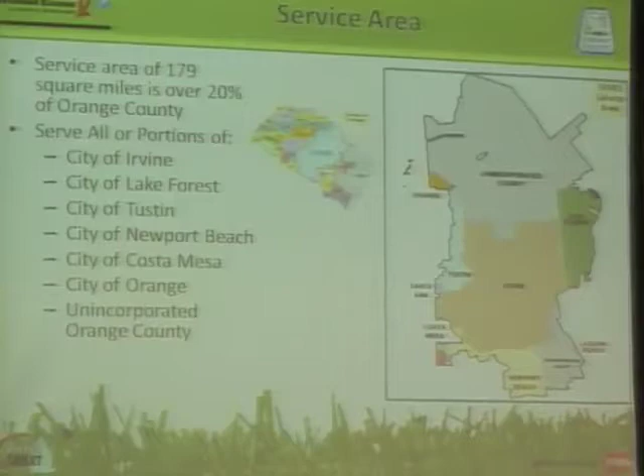So Irvine Ranch Water District, we're actually located in Orange County. We're about 20% of Orange County. And so we serve all of the city of Irvine, plus portions of 5 other cities and unincorporated county. And we have been practicing water use efficiency at least since the late 90s, if not earlier. It's something we took to heart very early on.

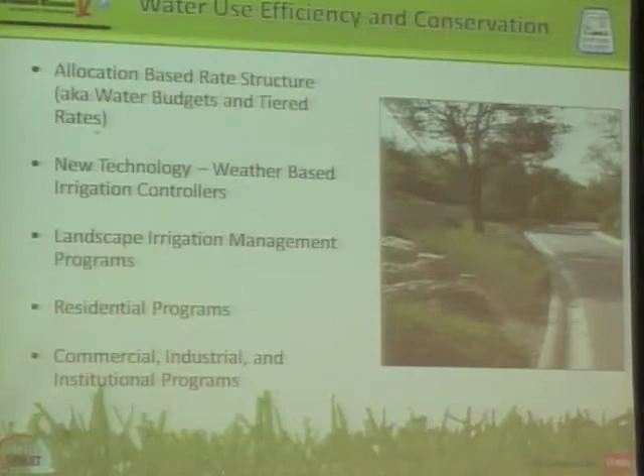I'm going to talk to you about a water budget-based rate structure that we actually adopted almost 20 years ago. We've also been a leader in doing studies and researching new technology, weather-based irrigation controllers. We were one of the agencies that first studied those. We have very effective landscape irrigation programs, and I'll share a little bit about some of those with you. I'm not going to focus on them today, but we obviously also have programs for our residential, commercial customers too.

So let's see, water budgets. What's a water budget and why would you care? In simple terms, a budget for anybody is usually just a list of your expenses and your revenues. And really, you come up with a plan for how you can save. And what I like to do is spend, so a plan for how you can spend, how you use the money. A water budget, real simply, is just a plan for managing your water use and saving the water that you might be wasting. And in that way, you're going to also save money and a lot of other things too.

Typically, one of your major costs of landscape maintenance might be water. That isn't going to change. I was just chatting with Tim from Metropolitan; they provide all the imported water to Southern California. We're a water agency that sells direct to customers, but we buy water from Metropolitan as well as have local supplies. Our cost of imported water from Metropolitan over the last 5 years has gone up 75%. So why do all these things about shortages in the state matter? Because ultimately, the costs for all of us are going up.

And that means water rates might be going up, and guess where you can save? By really managing your water and looking at your water bills. So it really helps if you're tracking your water budget versus your actual use. And your water budget is one of the great tools that can be pretty cheap to help you do that. It can be as much as tracking it on a piece of paper or in Excel, or it can get more complex than that.

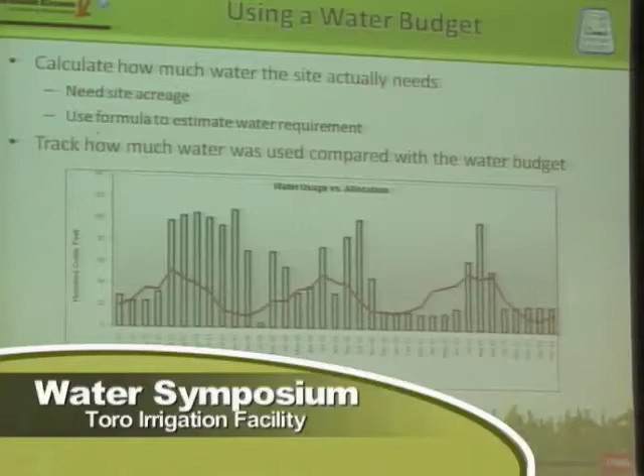And if you don't know, then I would really recommend that you find out, because how would you know whether you're wasting water or not if you don't know how much water you're supposed to be putting out there? It might be worth it to have your landscaper measure, or look if you've got landscape plans, or find out. And then there are general formulas that you can use to estimate how much water you would need.

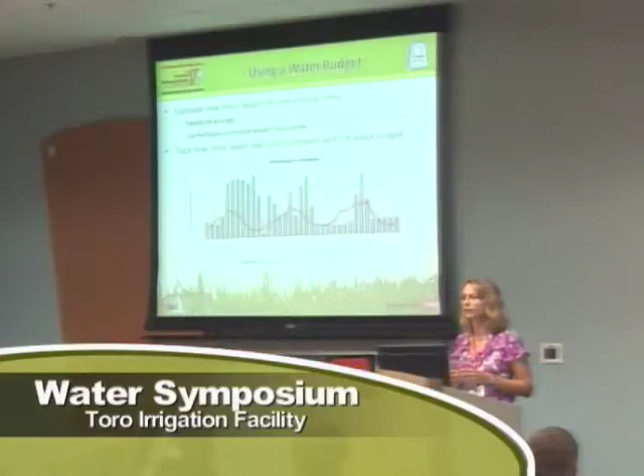And a lot of us water agencies, water utilities, we're not the only one, Eastern Municipal, Western, a lot of us utilize water budgets and have tools to help you figure that out and actually work with your water budget on a monthly basis. And I'll just show you, this is a graph from a customer potentially. This was just done in Excel. You put in the water use, you put in how much the budget should be, and it shows some interesting things.

The red line is actually how much water that customer should have been using. And the blue bars show monthly how much they were using. And you might notice that there's kind of a pattern in the fall months where the water use gets really over budget. Guess where maybe the customer might need to be saving, or where there's an opportunity to cut back on water use. So just by tracking, you can sort of identify these patterns.

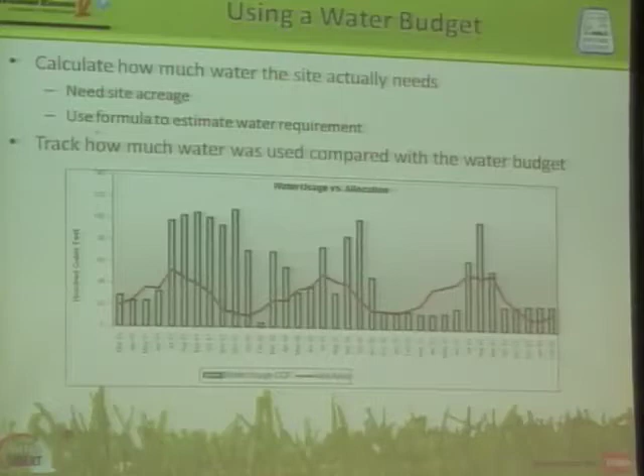I talked a little bit about water costs increasing; imported water is going up. We have a lot of constraints. Water agencies are going to be looking at how they can keep their costs low. One way we can keep our costs low is if we don't have to import as much expensive water, and we can use our local resources more effectively.

If we can help you do that, if we can utilize recycled water, that's better for us and keeps your rates low. But you really want to be looking at your water bills because your costs are going to be going up. And we're doing everything we can to control that, but there's still going to be a cost issue there.

As a result, what a lot of agencies are moving to is adopting water budget-based conservation rate structures or tiered rate structures. Agencies are beginning to look at how we can use our rate structure to communicate to our customers how water is being used.

If you see a high bill, that's our message to you that you might have a water waste problem. And we might be able to get your attention a little bit better through your pocketbook and hopefully have us come help you figure out how to get out of that situation. But you are going to see those costs increasing. And obviously customers who are wasting water are going to be the most heavily impacted.

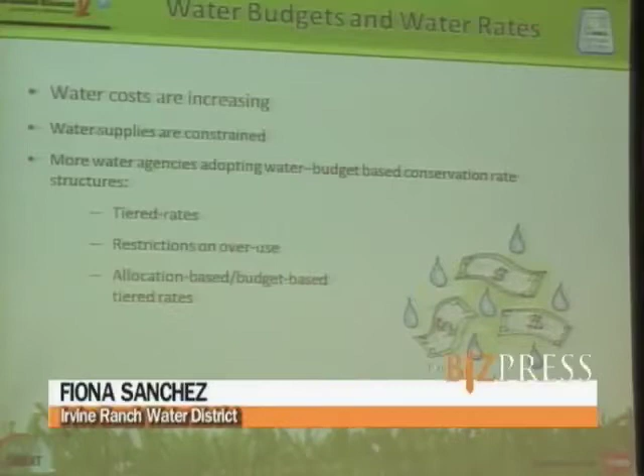So allocation-based and budget-based rate structures, IRWD adopted almost 20 years ago. For a long time, we were the only one out there. I can tell you that over the past few years, a number of agencies, some in this room and in Southern California, are looking toward this model because this is a very fair, equitable way to bill customers. So how does the IRWD one work?

Basically, we allocate our water based on your site-specific use and your landscape needs. We know for all of our sites how much irrigated acreage there is. And we do the little math, just like you could do, and we figure out how much you need. It's adjusted for climate, and it's fair and equitable. It's based on water need.

So we don't just come and say, well, we're in a shortage this year, guess what, everybody cut 10%. That might sound fair, except if I've been saving all along and I've got to cut 10%, is that going to be easier for me, or for the guy down the road that's been wasting all along? So a water budget-based rate structure looks at the equity of that, and we allocate the amount of water that you need for your site.

So we are encouraging you to use water within the allocation through a significantly, that's my favorite word here, tiered commodity pricing system. And I'll show a little bit about how we do that. Through our bill and our rate structure, we provide economic incentives to reward efficient use and disincentives if you're being wasteful.

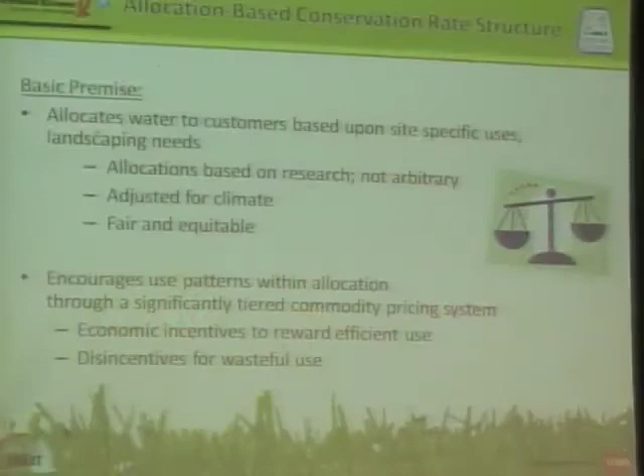So IRWD's landscape allocations, as I mentioned, are based on your irrigated area, and we use evapotranspiration, ET, as a measure of how much water you would need for your site. And as of July 2009, the basis we use at IRWD is a crop coefficient for warm season turf. It averages about 0.6 over the course of a year.

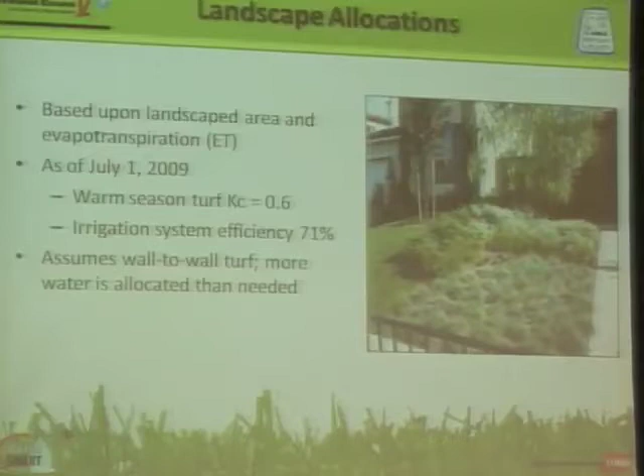We figure if you're going to put in turf, put in something that's more drought tolerant. But we also assume that you've got wall-to-wall turf, and we know that most landscapes don't have that. You've got a mix of plant material. We also adopted an irrigation efficiency of 71%, which exactly mirrors what's in the model landscape ordinance. So really our allocation should still be more water than you actually need on site.

We give you 0.84. If you have a site, you still have to comply with the model landscape ordinance. It's just that on your billing from the water district, we're going to give you a little bit more water. So you wouldn't be in compliance with the model ordinance if you weren't meeting it, but we give you a little bit of buffer.

Where do we get ET data from? You heard about the CIMIS system. There is the CIMIS system. At IRWD, we actually have 3 climate zones within our service area, and we actually maintain our own weather stations. So we get data in daily that we can use for billing purposes.

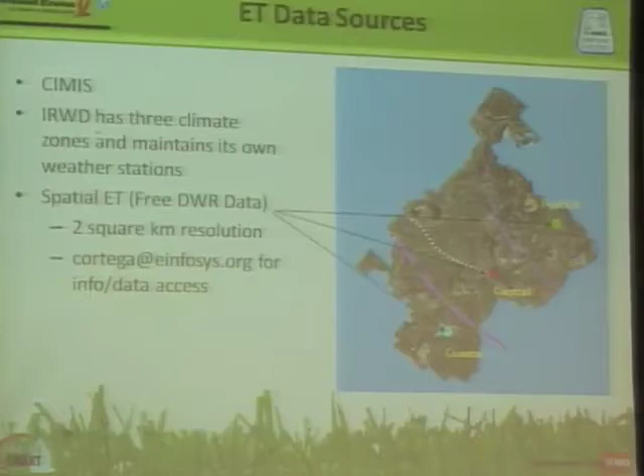If you're a water agency that wanted to do that, CIMIS has weather stations. CIMIS also has a new thing called Spatial CIMIS, and you can get that information for free. Or if your water agency doesn't have anything like this and you're a water manager and you want to find out how much you need for your site and you need that ET data, you can get it right from the CIMIS website for free. And it's actually, I think, now at 2 square kilometer resolution that you can get that data.

So when I talked about significant tiers, this is what I was meaning. We actually have 5 tiers for our landscape accounts, and our rates are relatively low for the first 2 tiers. Our first 2 tiers give you 100% of the water you need for your site. So the first 40%, we actually even give you an incentive. We say, hey, if you're that efficient, we're going to give you a low volume price break. So that's 91 cents per 100 cubic feet.

And for those not familiar with 100 cubic feet, that's 748 gallons. That's a heck of a lot of bottled water for 91 cents. So then the next tier, our base rate, is $1.21. So that's really all your water you should be able to get at those 2 tiers. But what if you're not managing your site very efficiently? What if you're using water in a wasteful way?

Well, then for the next 10%, you're going to pay about double the cost for each CCF. So it goes to $2.50. What if you're even more wasteful than that and now you're excessive? Well, again, you're going to pay double. You're going to pay 4 times for all the water in that tier for the next 10%, $4.32. And I'm sure that it doesn't apply to anyone in this room, but what if you were really wasteful? Anything more than 120% over budget, you're going to be paying close to $10 for that water per CCF, $9.48.

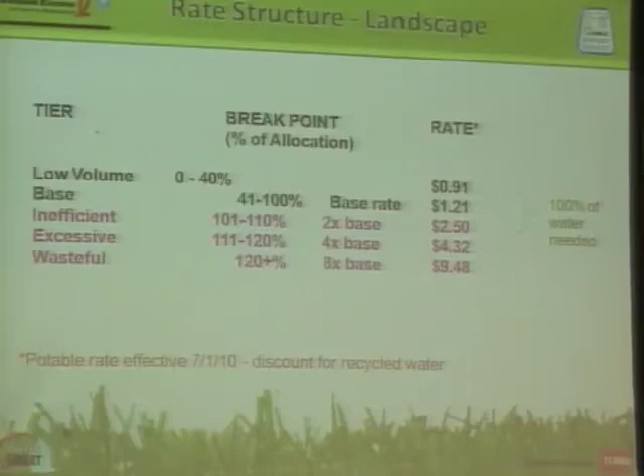These are our new rates we just adopted this year. We actually also have a water budget for recycled water. You get a rate discount, but at IRWD, we think that all water is a valuable resource and can't be wasted. So you'd be on the same water budget, you just get a little bit different price. You get a price break. So as you can see, it gets really expensive really fast with these types of rate structures to be wasteful.

So what we do actually with that money that we get from those penalty tiers is we use it to fund our programs for water use efficiency, to provide landscape irrigation upgrades and other programs to help our customers be efficient. So it actually all comes back in later, but we want to send a very strong message, and we think this is a strong message that we can send. And also, these costs are based on our cost to buy that expensive water. It's directly tied to if I had to buy expensive water from Tim.

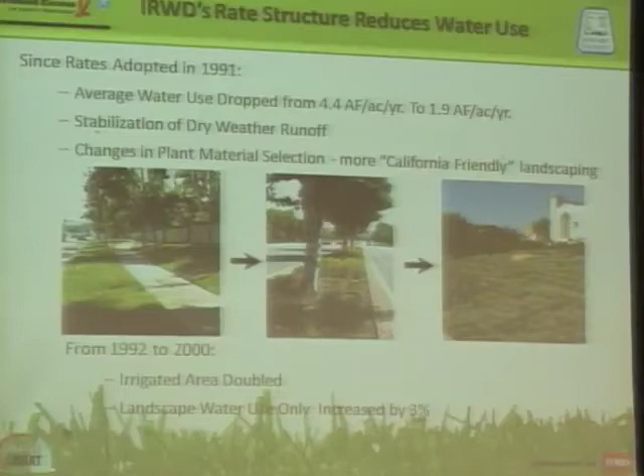That's showing you the extent of savings. And if you're not in our service area and think, I don't have to worry about that, water agencies, this is the model that they're looking at because of all these pressures that Mark and Tim were explaining. So I think you need to be prepared and need to be planning for things like this.

So really, what's the bottom line with water rates? How do you know what you should be looking for? Well, a big sign of overwatering might be a high water bill. If you get a high water bill, okay, probably you are going to call up your water district and complain, but you might want to look at why you got a high water bill. Did you have a leak? Are you overwatering and things like that?

So don't just, well, do pay the water bill. I was going to say don't just pay the water bill, but do pay it first. But then take a look at that bill and see what information you can get from it. Look for red flags. Did you have a sudden major increase in usage and you didn't put in new plant material? Look at the costs. Has it gone up? If your water agency is using tiered rates, that really can help you flag high use.

Not all agencies have allocation-based rates, but a lot of us do have tiers. You'll see tier 1, tier 2. Don't assume that just because you're all the way up in tier 5 that that's where you should be. Maybe not. Maybe you could have all your use in tier 1. Try to figure out why. Track your use and monitor patterns.

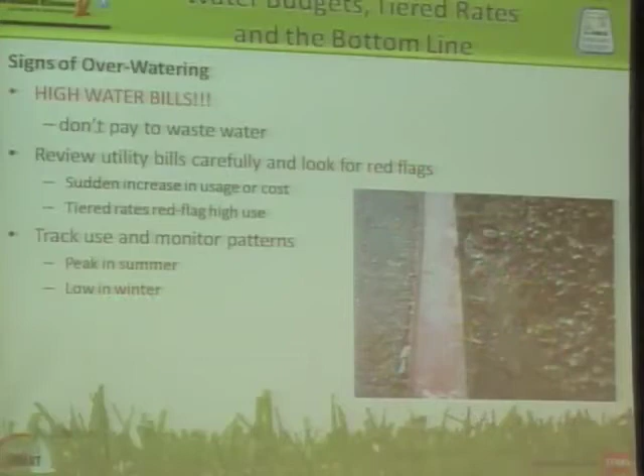Nick over there, our landscape guy, he's always telling me, take a look. When I see water use that doesn't change at all from winter to summer and my water bill is exactly the same 12 months a year, that actually is a problem because your water use should be changing. Customers tell us, well, I use the same in February and August. That's not the way it needs to be.

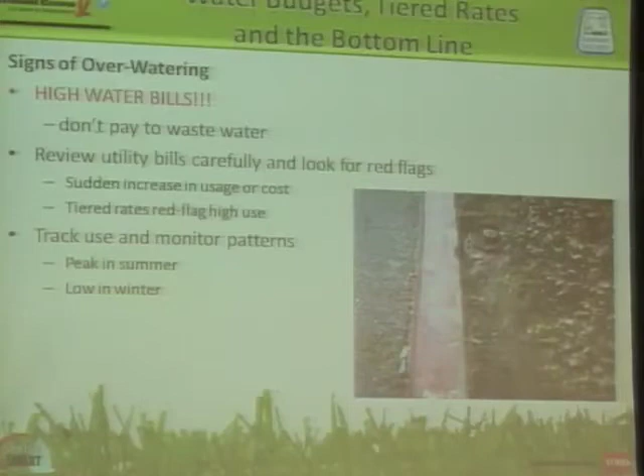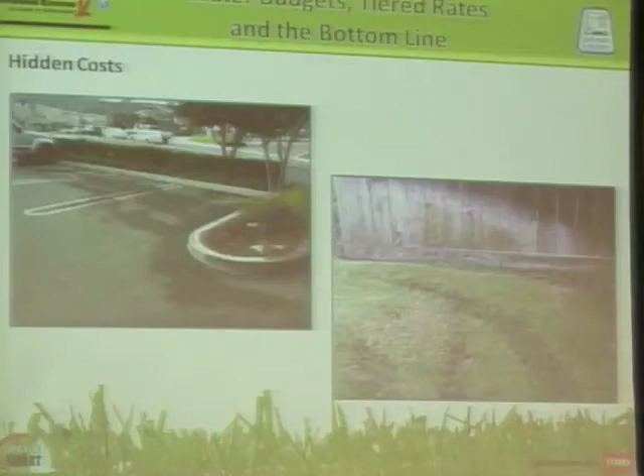Look at the fence right here. How often are you going to be replacing the fences on your property? Again, these are all photos that we've taken out in the field. Overuse of water doesn't cost you just directly on your water bill. It costs you in a lot of other ways too on the maintenance of your property.

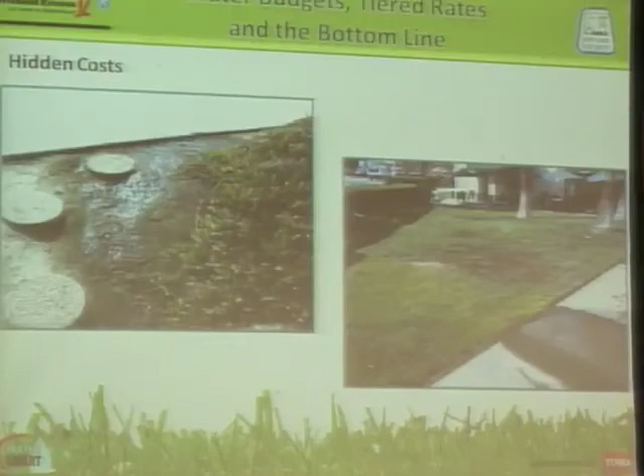Here's more examples of hidden costs. Here's a really attractive site that I think with maybe a little bit better landscape management, they might not have a big bald brown patch in the middle. Usually the response to that, if they're not good practitioners of water management, is guess what? Turn up the water. So the water use goes up, the site doesn't look any more attractive. Do tenants want to move in? Probably not.

So really the bottom line is, manage your water use and control your costs. Take a look at your water bills. Contract specs can be really important. Are you really going for low bid? Because low bid is not necessarily what is going to get you good water management. Are you speccing that whoever is working on your landscape has some certifications in water management, that they've attended a class, that they're certified? Because if not, you might not get the person that really knows what they're doing.

Site walkthroughs are great to spot things like this. And there are lots of resources available, whether you have them yourself or from your water utility. A lot of us, we like to help our customers. Meter tracking sheets. You can read the meter every week, find out how much you used. You don't need to wait a month for a water bill. The landscapers on site, have them read the meter. You'll know if you've got any big surprises or leaks.

Utility-sponsored programs and water budget-based rate programs. If you're in Orange County, there is a free service available for any property manager, landscaper, HOA board member, whoever wants to get on, and you can get free performance reports showing you your water budget. IRWD also offers this as a service to our customers because the person paying the bill might not be the person that needs to know the information.

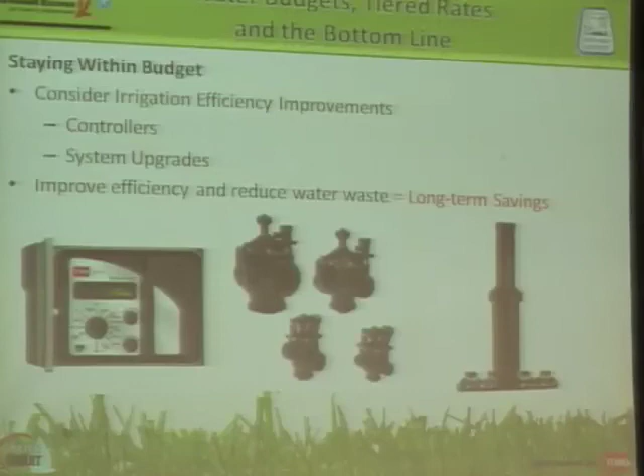So to summarize, water costs are going up, and I don't think anybody's expecting them to be going down. So how can you manage? You're going to see water agencies implementing rate structures. Using water budgets, whether it's from your water agency or something you stick in Excel or track on a piece of paper, and knowing how much water you need to be using, can really help you save because it can identify problems with your site. So do that and take a look at the patterns of use. If it never changes all year round, that's a problem. Use the info to identify those problems.

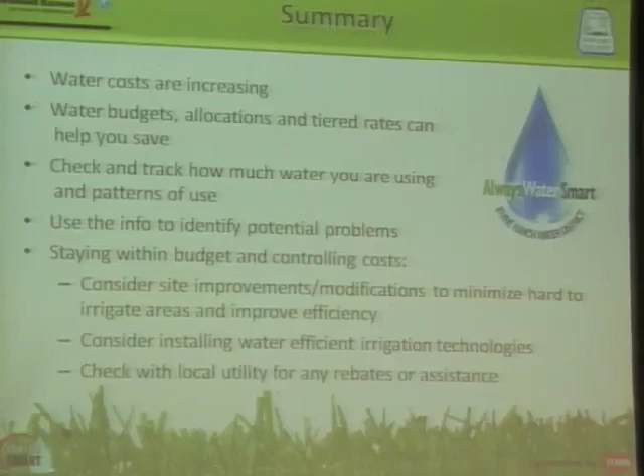And then in order to stay within budget and control your cost, think about potential site improvements. Modifications to minimize your hard-to-irrigate areas, and how can you improve your system efficiency. And think about installing water-efficient irrigation technologies. Check with your local utility for rebates or assistance. If you're in Southern California, we have great programs offered both by Metropolitan and jointly through retail agencies, so check with us. We have websites. Commercial properties, Save Water, Save a Buck, we have water efficiency rebates there. So all of that can help you take advantage of these new technologies.